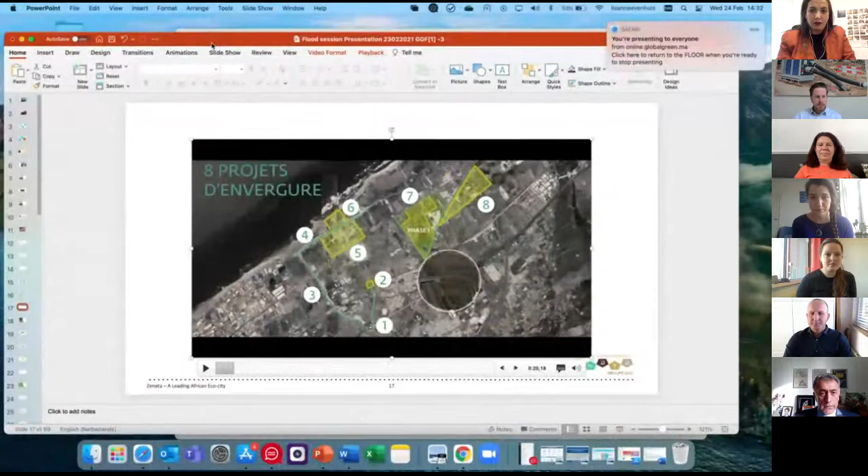Yeah, good. I see the screen on full screen, so that's good. Voila. Got it.

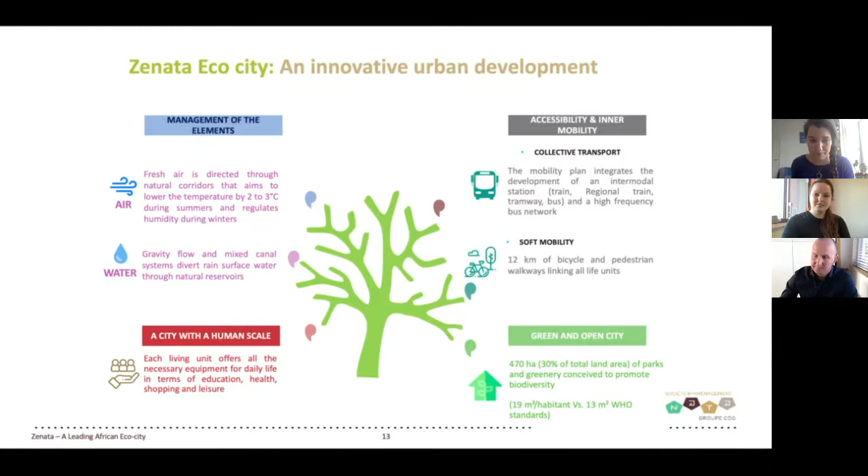And finally, it's a forest within the city, with more than 30% of total land areas of park and greenery conceived to promote biodiversity, representing 19 square meters per inhabitant, higher than the WHO standards, and in comparison, for example, with a city like Casablanca, which offers only 1.5 square meters per inhabitant.

To sum up with some key figures, Zenata is a public utility project aiming to rebalance the Greater Casablanca region by creating a new urban center based on social cohesion, economic development, and environmental protection, developing more than 100,000 jobs for a population in the long term of 300,000 inhabitants, distinguished also by 4 high-value-added areas: the health cluster, the education cluster, retail center starting with IKEA, for example, and logistics center.

It's also a sustainable project entrusted by major stakeholders. As I mentioned, we are supported financially by AFD, the French Development Agency, with EU, also with the EIB. We have also a lot of national and international partners, such as Serway, such as AME, for example. With healthcare, we have developed conventions with Saudi German Hospital; they will have their first experience in Morocco with Zenata.

For the retail, I've also listed IKEA, but we have also Société from Portugal, for example, and main real estate partners that accompany us on establishing this new vision of a city in Zenata.

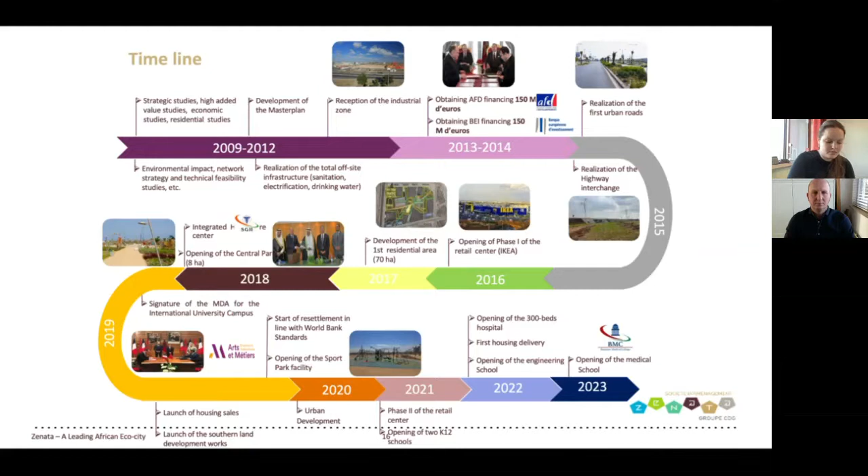So what has been achieved to date? As you can see on this timeline, a lot have been done to establish and implement Zenata on site, but maybe a video is worth 1,000 words. So for the next slide, please, if you can play the video. Thank you.

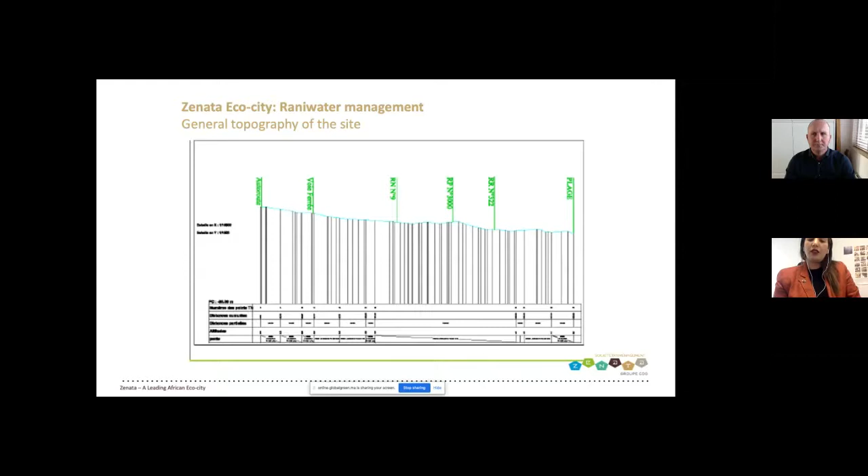Surface stormwater flows were favored by the road according to the preferential natural path. Improvements such as ditches and channels will be provided when the water level at the road is high and cannot be accepted. Natural depressions with great storage potential will be used as retention basins, designed to limit downstream flows and optimize the cost of linear structures.

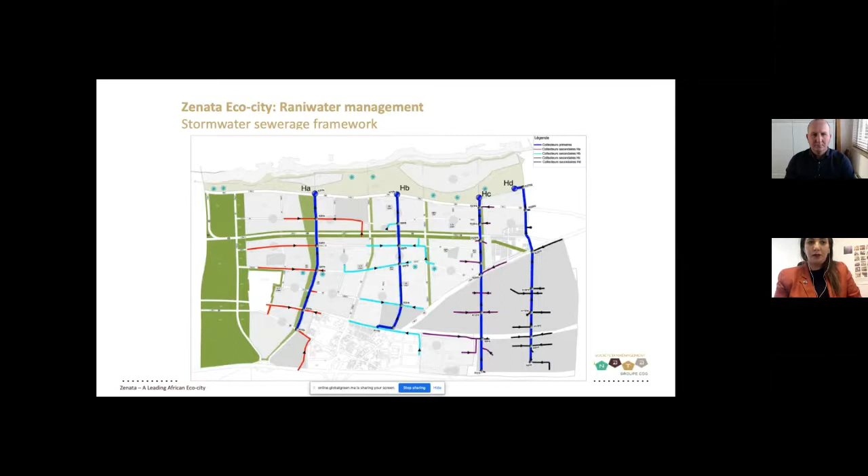So what we did was flow modeling, identifying the direction of road flows in order to establish this drainage management system for rainwater drainage.

The variant adopted consists of setting up a stormwater buffer system with two basins, HA and HB, shown on top of the picture. Collectors create dry basins, retention basins located on the coastal strip downstream of the coastal road, as well as a second retention basin within the HA basin.

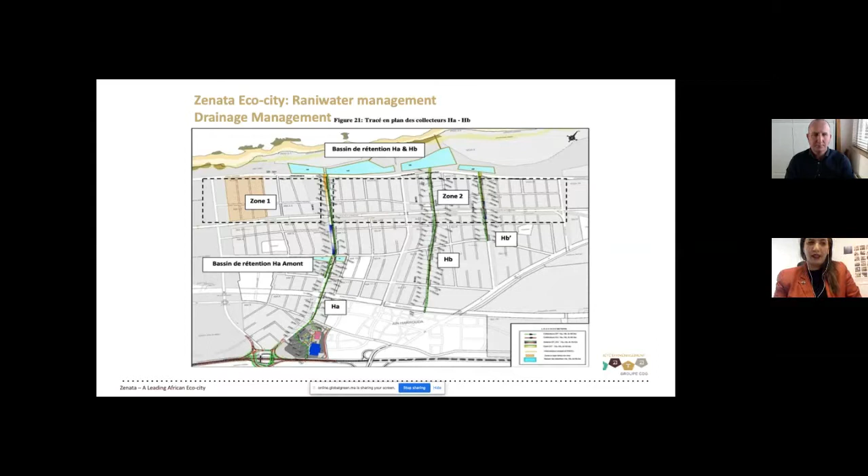As you must have followed, Zenata has experienced, as everywhere in Morocco, a particularly intense rainy season this year. We were able to test the resistance of our system, which demonstrated great efficiency when large cities like Casablanca were affected by floods.

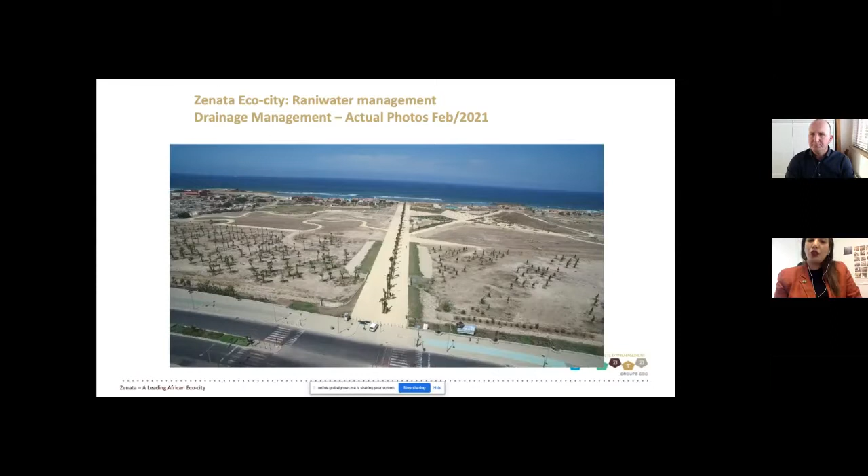As you can see in this photo taken two weeks ago, the HA basin on either side of the axis leading to the sea has perfectly fulfilled its function of collecting, flood clipping, and infiltration of rainwater. We have included these basins in a coastal sport course of Zenata, sheltering parts of the jogging courses which are used in dry periods.

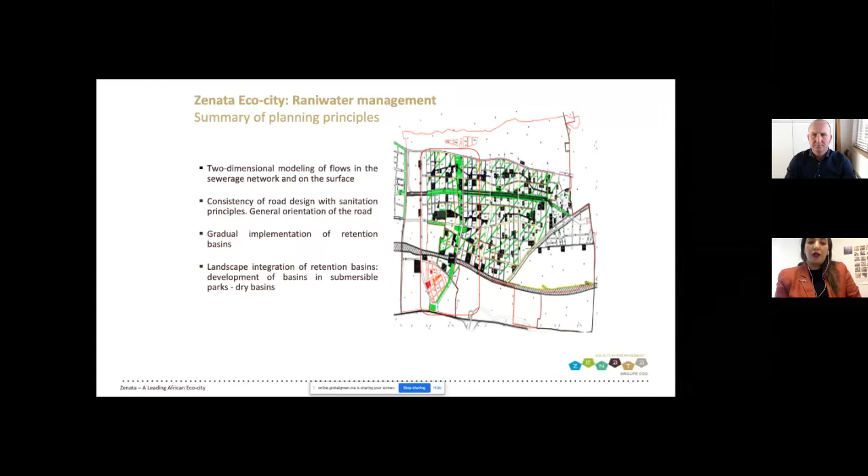As a summary of planning principles, we have adopted two-dimensional modeling of flows in the sewerage network and on the surface. We have developed consistency of road design with sanitation principles. We have a gradual implementation of retention basins, and finally landscape integration of retention basins, developing them into submersible parks with dry basins.

Nevertheless, some constraints still occur, such as availability of land, because we are also in urban areas known for rare urban availability of land. Proximity to use, so we have had to take into consideration the costs of water transfer from the place of production to the place of use. Regularity of the resources for the guarantee of service. Project financing modalities, common public mandates supported by the River Basin Agency, for example governance operation of infrastructure, and this has led us to develop a new reflection on mobilization and use at the level of residences.

So what we are now conducting is a study. We are about to finish up this study. It's a study of collection and use of rainwater in residential facilities and collective buildings in Zenata Eco-City.

We first started with the identification and quantitative assessment of substitutable uses for drinking water, then developed typical rainwater harvesting solutions adapted to the characteristics of residential buildings in Morocco, then constructed a storage simulation and sizing tool to help us dimension and properly adapt the facilities to the use here in Morocco.

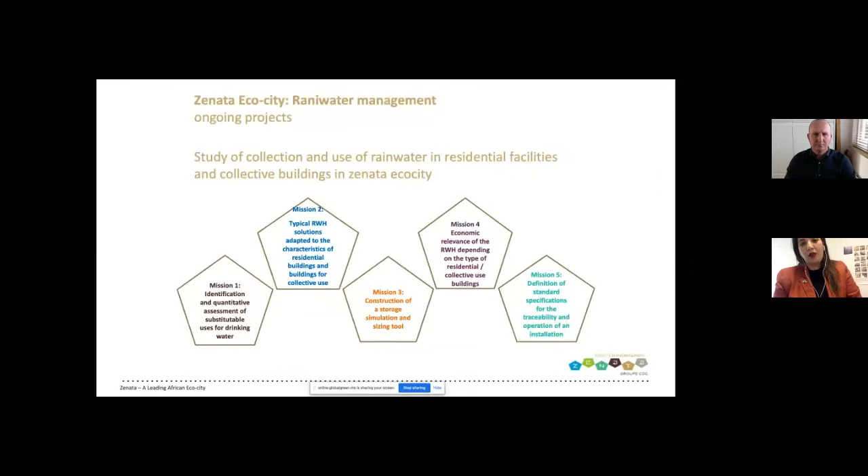Then an economic relevance study was made for rainwater harvesting solutions depending on the type of residential and collective use buildings. And now we are closing up this mission with the definition of standard specifications for the traceability and operation of an installation. Of course, we will be happy to share the results as well as the implementation of the recommendations of the study as soon as possible.

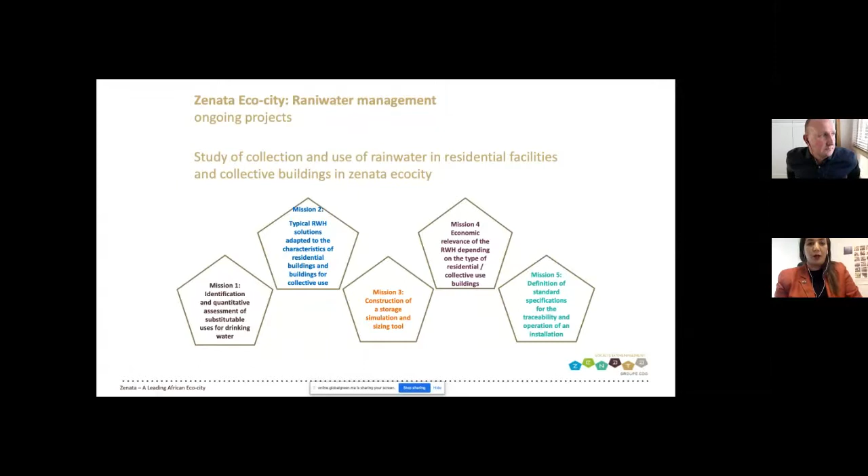Thank you very much. This was for Zenata. I will be very glad to answer your questions.

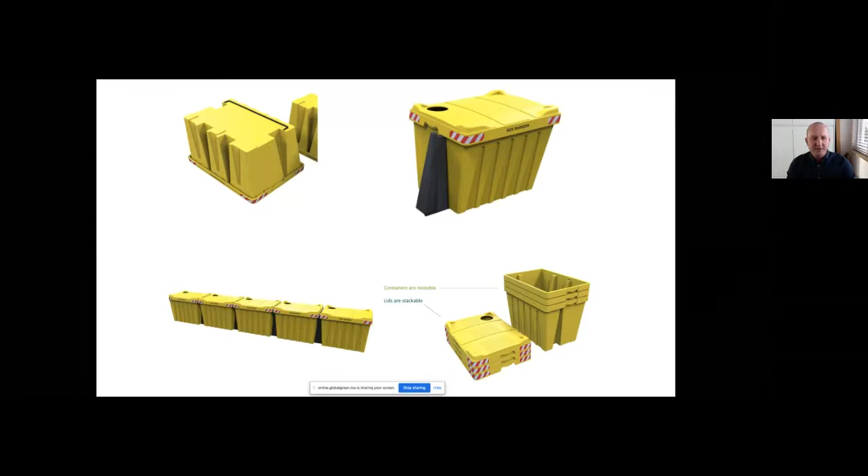To give you an estimation on how big the box barrier is, it's about 1 meter wide and 60 centimeters high. There's 285 liters in each box barrier, so once they're connected to each other, it creates a lot of weight and a lot of strength. To give you an estimation, about 50 sandbags is one box barrier, so it gives you an idea: just to place one box barrier or 50 sandbags, it saves a lot of time.

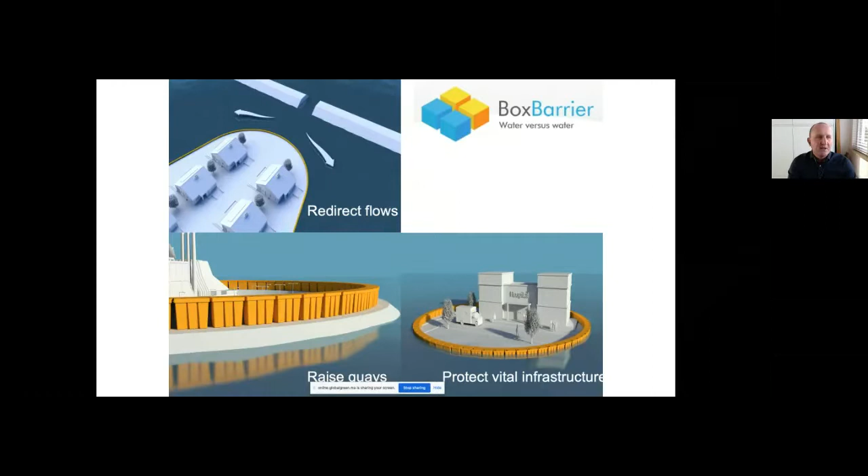If you can go to the next slide, I'll be happy to introduce a bit more on BBA, the BBA product line, and what it can do for flood control. It seems we lost the presentation. I don't see the presentation, but I assume everybody else can. If you can go to the next slide. BBA has a dedication to build the world's best portable pump solutions, offering our customers the lowest cost of ownership. So what we do is we provide highest uptime, reliability in the product, and highest performance.

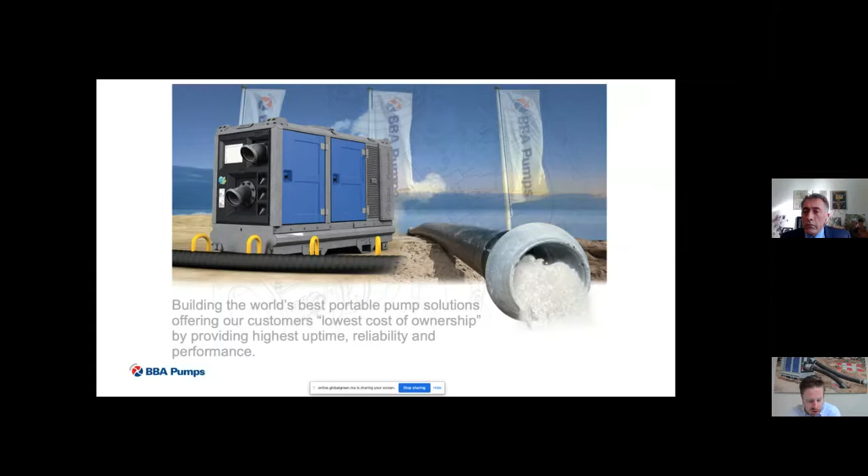If you go to the next slide. We do that with a 4 years limited warranty backup. Although my French is really limited, we do have support in 12 languages globally, amongst which is French. So for the people in Morocco, we can also have the French backup in our pump systems, as well as in our support team. If you go to the next slide.

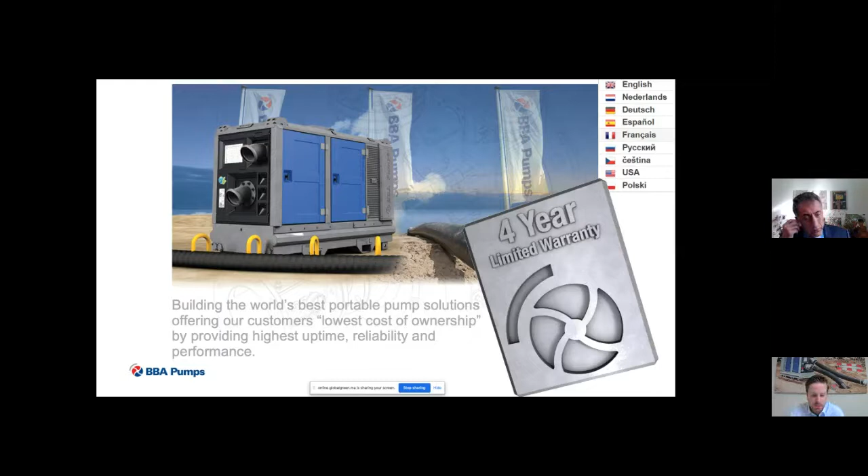There was one before that, I believe, or at least there should be one, telling a bit about our branches. We are a Dutch manufacturer, so we have a setup in the Netherlands, an assembly line, sales offices. We have a production facility in the Czech Republic, and sales support offices of our own in the United States, Poland, Belgium, and the Netherlands. We are supported internationally by a global distributor network.

I am looking at a slide showing our pump system. So if that's what everybody is seeing, I can continue with that. It is a fully autonomous pump, what we supply, either diesel-driven or electrically driven. In case of a diesel-driven pump, it contains an engine, a fuel tank, and a pump.

Basically you can set it up, start it, and it runs. It has a control panel which you can regulate the pump with, but also with float systems, so in case of emergency setups it can switch on and switch off automatically. With high water level, it switches on, pumps the basin empty, and when the water level is low again,

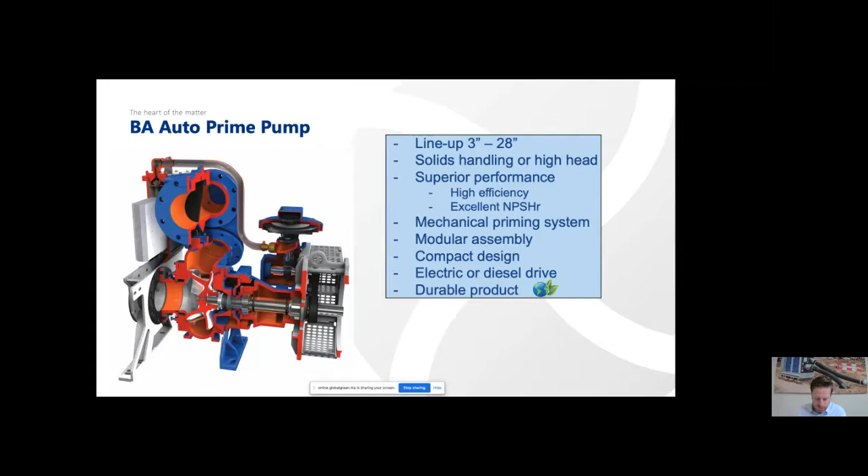To touch the subject of this afternoon, I want to show some recent projects, or at least a recent project which is also close to the Zenata setup, I believe. The Overdiepse polder, a setup in the southern part of the Netherlands, where they lowered the dikes to have room for the water, as they call it. Next slide shows how the past situation was.

The Netherlands, situated in the southern part, especially there, the water level is pretty high and the countryside is pretty low. There's a delta of 3 major European rivers, where in the past we had quite a lot of water flooding risks. Especially in '95, 250,000 people had to be evacuated from an area when the rivers were pretty high again.

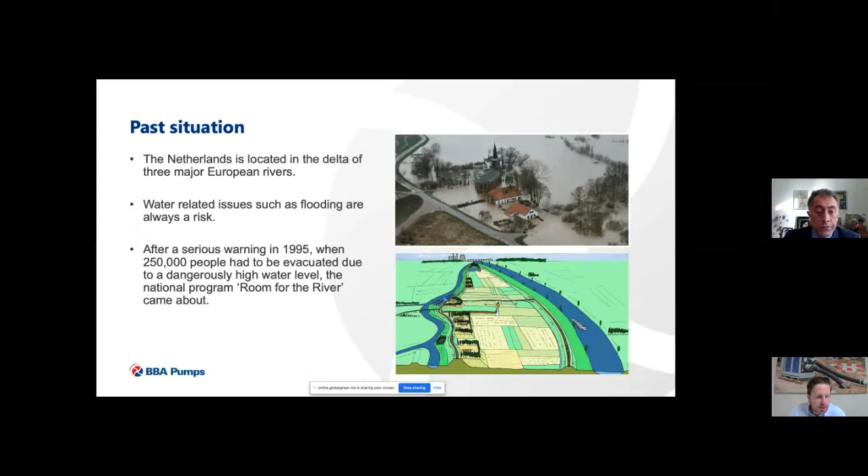So that's where the plan for Room for the River came about. If you go to the next slide, we show how it was situated. It was done by the Dutch government. They determined 30 water storage facilities in the Netherlands, one of which is Overdiepse Polder.

That's an area where they can store 9 million cubic meters of water as a temporary storage. With that storage, they can lower the overall river water level by 27 centimeters, and basically that is sufficient to protect 2 major cities in the southern part of the Netherlands from flooding. With that, they create a safe environment for more than 4 million people.

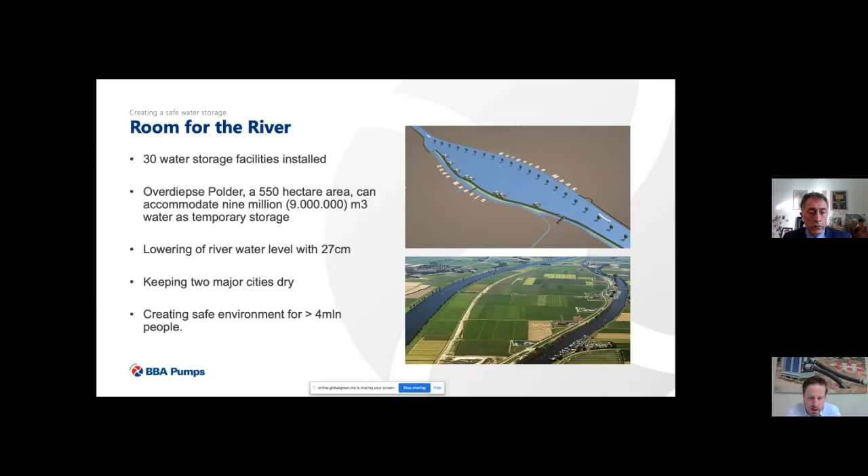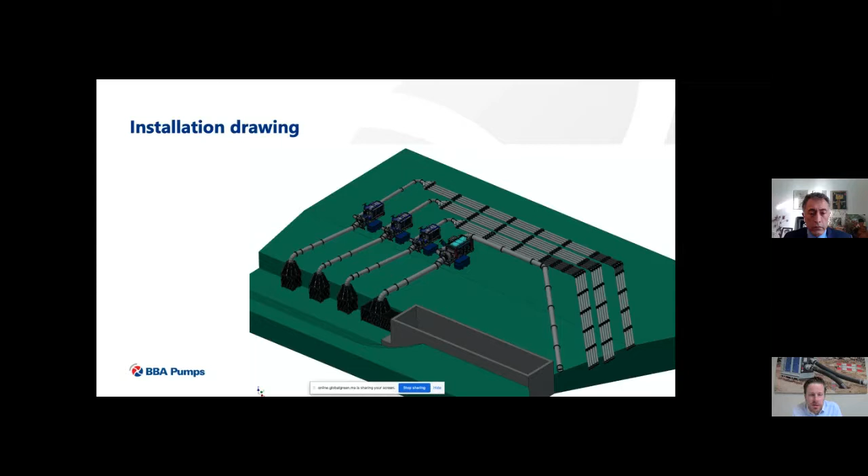As part of this plan, they made an arrangement with the farmers in that area, where the land had to be dry again as soon as possible. On the next slide, we can see an installation drawing of that. Besides the normal flow of water, they used temporary pump solutions to evacuate that area from water as fast as possible. So on this drawing, you can see 4 of our pumps situated with all piping. On the next slide, you see how it's being used.

4 pumps, fully autonomous again, but also fast in setup and installation. These 4 pumps create 20,000 cubic meters per hour of pumping capacity. With that, the government can assure the farmers in that area that the area will be dry again within 6 weeks from the flooding. At first, the water

level equalizes with the river, and the final pumping capacity will provide the drying up of that area in a faster way. So fully autonomous pull-up frames, so these pumps can be transported easily by truck, but also easily deployable. Setup of this whole system with these 4 pumps and all piping can be done within a day, and for this area, within that time frame, that is sufficient.

Next slide is an intermediate one. The setup as shown in the southern part of the Netherlands is a large one, but there are also smaller versions available. This is one deployed in Marrakesh. Radeema has a number of BBA pumps. In this case, it is an electrically driven pump, 4-inch, with a capacity of up to 190 cubic meters per hour. Also trailer mounted, so it can be pulled with a normal truck or van.

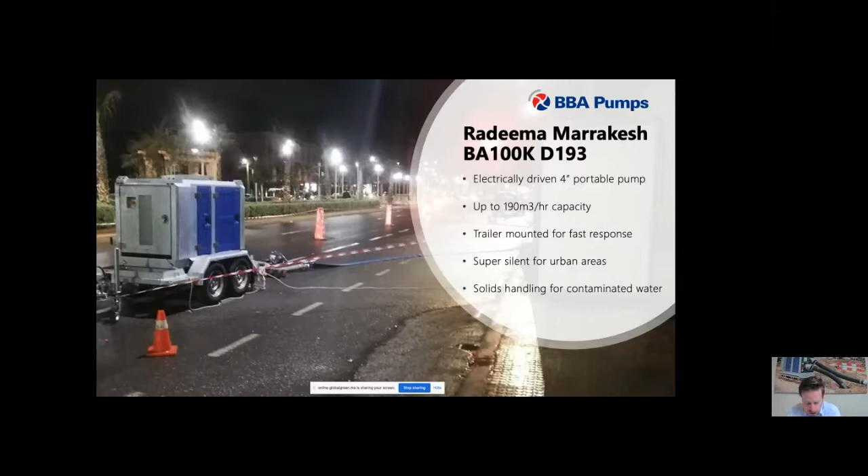On the next slide, there's another example of a similar pump, also deployed in Marrakesh. A slightly bigger one, the 6-inch pump, can handle almost 500 cubic meters per hour of water, but also solids handling again. As you can see, it's connected to the sewage over here. So they have different applications of these pumps.

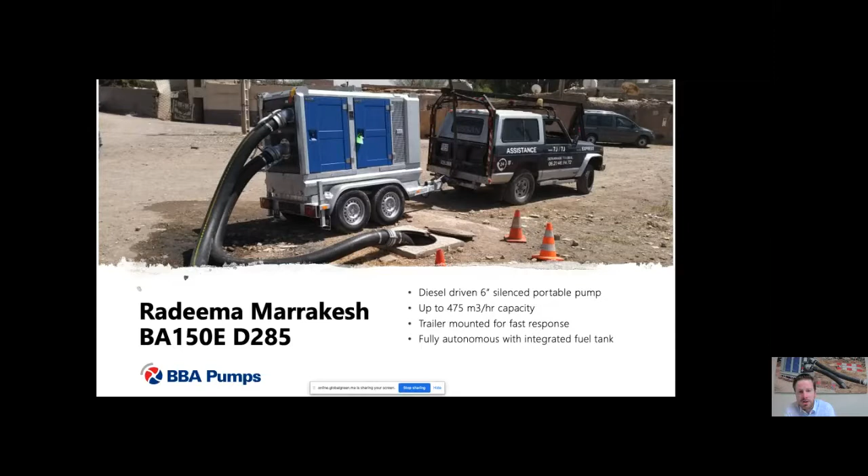In this case, diesel driven, so fully autonomous. Only fill it up with diesel, and it can be deployed. The next slide shows an example of a similar pump, in this case in Eastern Africa. So we see the applications throughout Africa with similar pumps where they all face flooding areas, Eastern Africa especially.

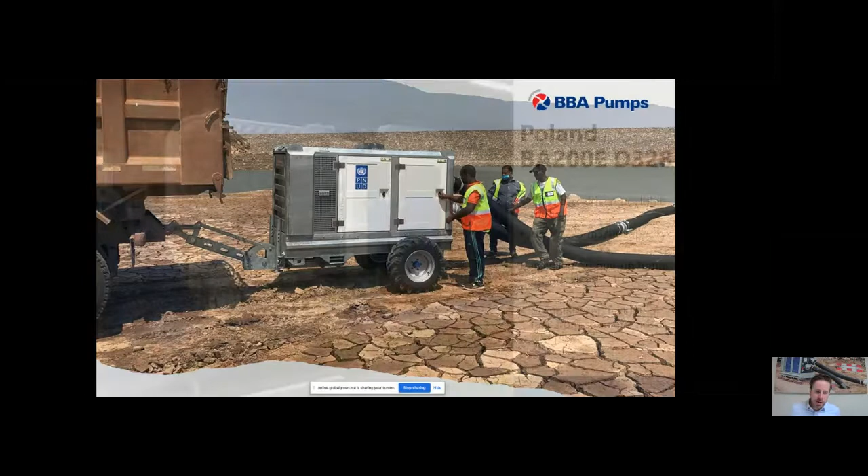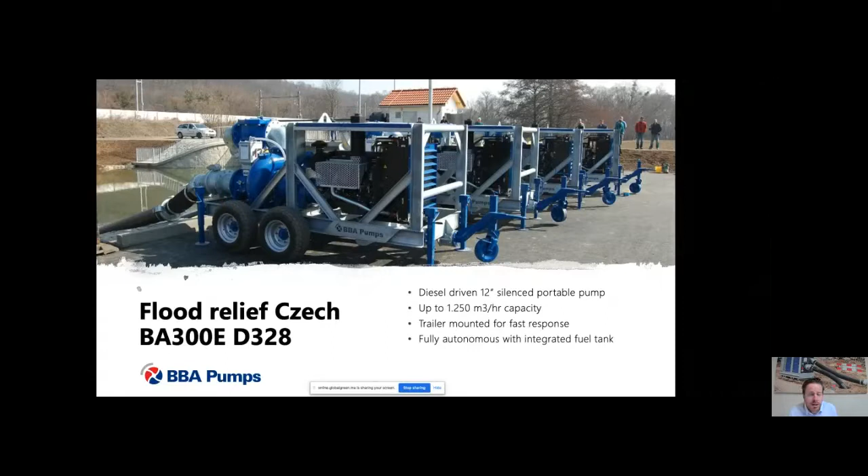Next is an example of a flood relief system in the Czech Republic, 12-inch pumps on a trailer as well, more of an agricultural trailer setup. So as an advantage, it can also be customized towards the wishes of a specific country or client group. Bigger one is the next slide, 16-inch pump, diesel driven.

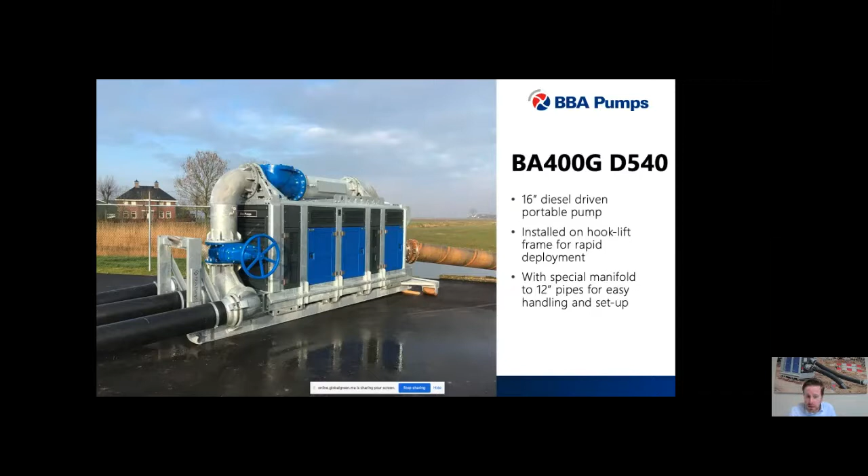Then you get towards a size where you need steel pipes or bigger pipes, which are hard to handle by hand. On the right-hand side, you see a bit of a corroded part, which is a suction pipe. But instead of a big pipe, we can also connect it to a manifold on the left-hand side, where you can see 12-inch hoses or HDPE pipes, which you can carry with 2 persons. So still easily and rapidly for setup.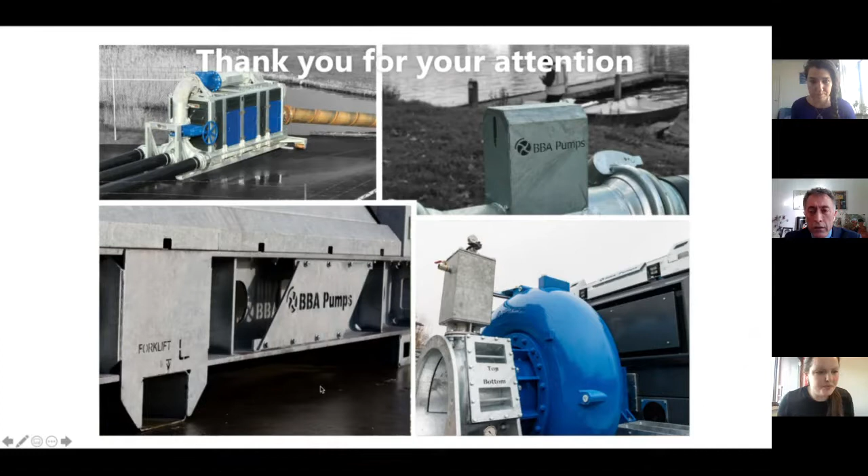I'm not sure, I cannot hear Sabrina for the moment, but anyway, I want to thank you on behalf of Sabrina for the interesting presentation. Thank you, Martijn. We cannot hear you, Sabrina. Can you speak? Yeah. There's no voice. Zana, I think we lost Sabrina. Yes, I believe so. Maybe she's on mute. Yeah, Sabrina, yeah. Exactly, but even when she's unmuting herself, I think it's still okay.

Not working, so let us just take over really quickly. At the last moment, I could not hear Martijn. Martijn, were you able to finish your presentation and address the possible questions? Yes, exactly, Lisanne, so there were no questions for the moment in the Q&A. And indeed, Martijn finished his presentation. Great, then let's move on to flood management after the flood. I see that Sabrina sometimes is on mute and sometimes unmuted. Now you're on mute. But indeed, I think it's good if we can continue with Mr. Rasoul Mikkelsen.

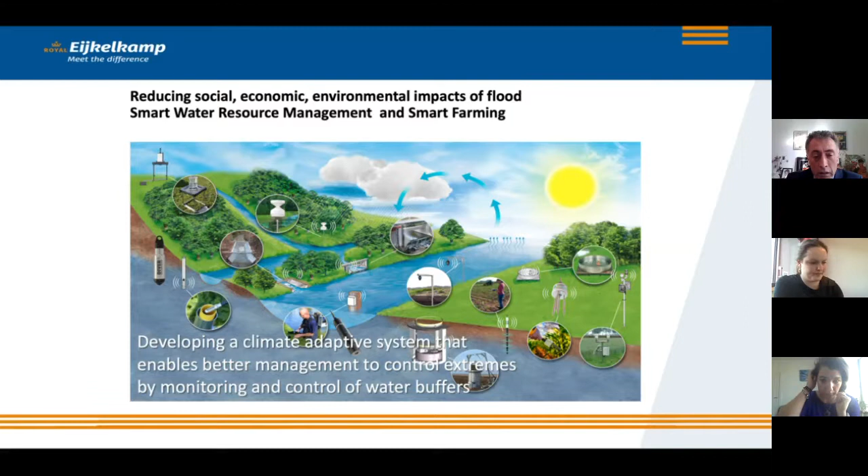Well, the next question is: okay, now we have flooding and there's a lot of water, and water is really scarce, especially in Morocco and other countries - we're seeing the scarcity of water. What we can do here is, by building underground reservoirs or underground water glass dams, discharge the water underground, make it safe there, and use it later on.

But most important is when flooding is happening, we have to handle emergency cases, and here water supply and sanitation is the most important issue. By using innovative solutions, we can really control and see the water quality, because flooding water is often mixed with sewage and wastewater. We cannot just discharge it underground and say let's use it later - we have to have a measurement and monitoring system to see the quality of the water.

And even maybe clean it before we discharge it underground, or we can build a system where we discharge the water underground and keep it there, then treat it and discharge it for farming or drinking water later on. The most important thing here is how we can monitor the quality of the water.

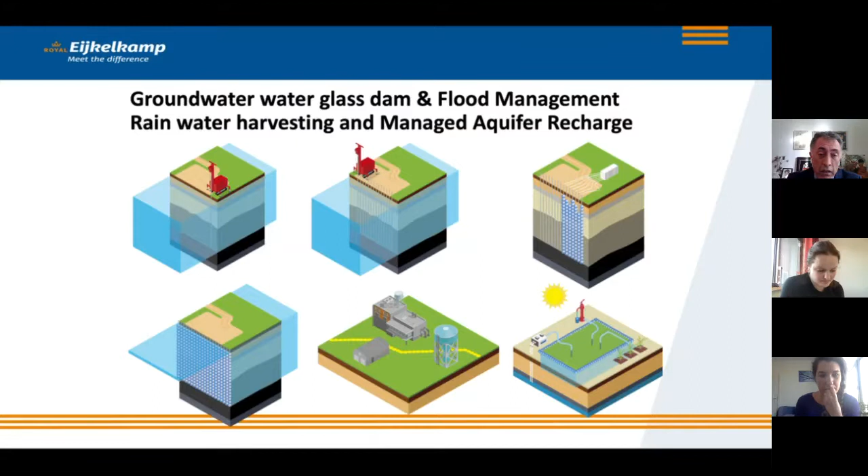So we have the solutions, but my last wish to everyone is, let's work holistically and look at these issues together, and work together to solve them. This is not only a Morocco or continental issue, this is a global issue, and people suffer every single year. With climate impact and change, it will be worse in the coming years, and we have to be prepared. Thanks a lot.

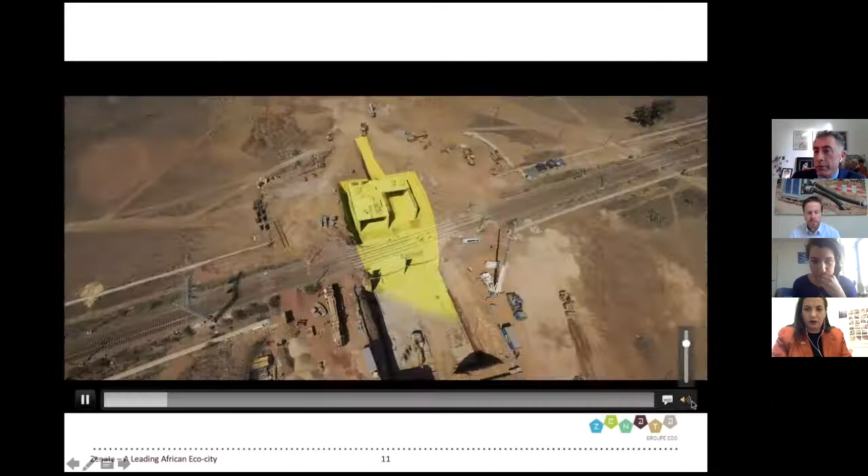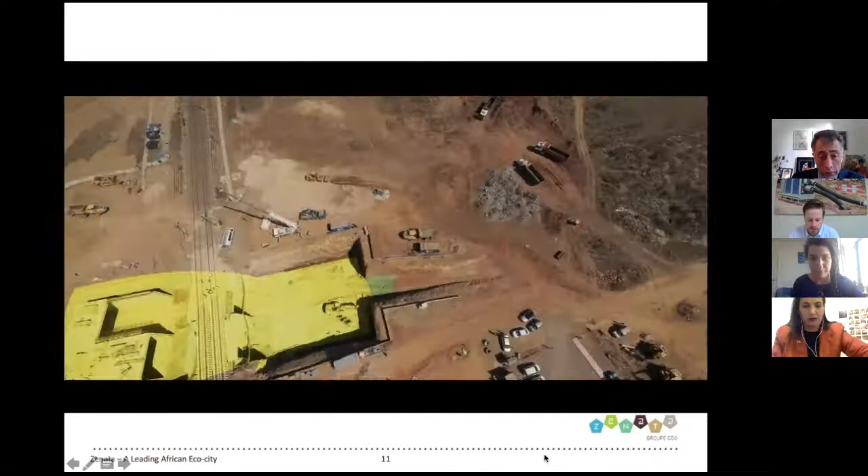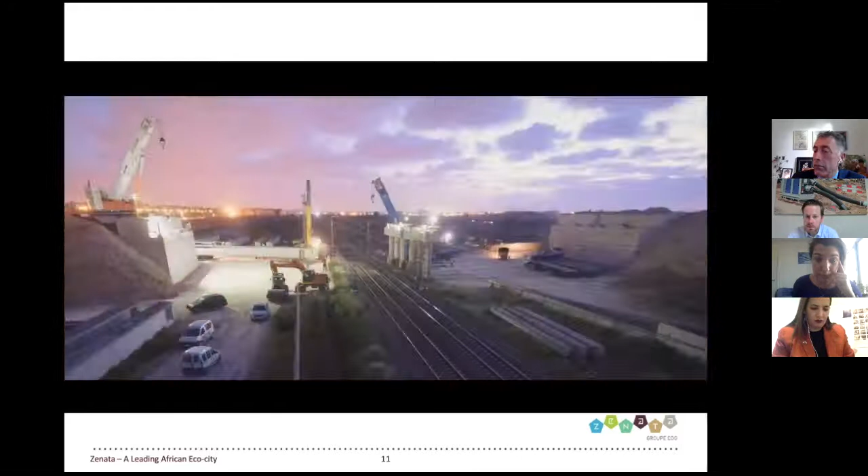No, unfortunately on this side I do not have the sound. No sound - the images are beautiful, though. Maybe, Nour, you can talk us through what we see.

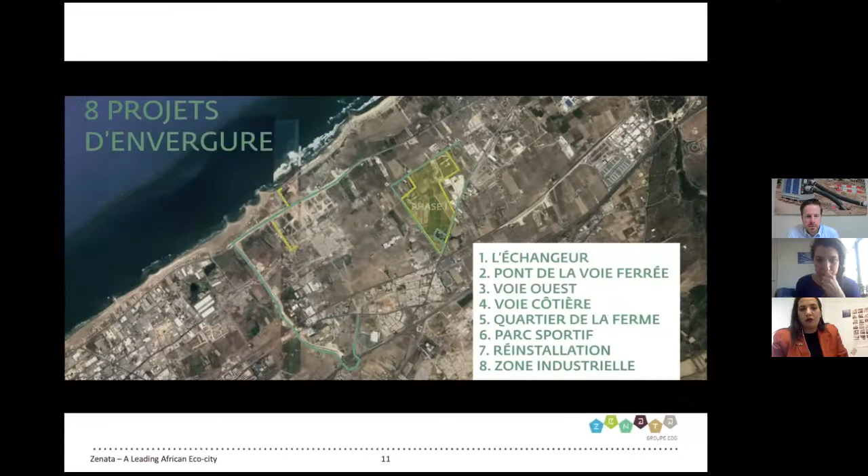Beautiful images, Nour. Can you say something about what we've just seen? It seems your sound is not working. Maybe reboot. We'll wait for half a minute or something for Nour to come back. I must say I'm impressed by the images we've just seen, and it's beautiful to see it next to the presentation she gave. Hi Nour, there you are.

Thank you. Sabrina, can you hear me? Yes. Okay, finally. Well, thank you again.

Thank you to the audience also for staying this late to see the video. The video was mainly to tell people that there is ongoing construction work on Zenata. It's not an empty field anymore - we can see a lot of construction going on from our side, but also from the real estate partners that we have on site. All of you, but mostly people from Morocco for now, are very welcome to come and visit us. Hopefully very soon we could also welcome you from abroad to come and visit Zenata and see all the construction work that is going on and all the facilities we are trying to make available for the population here.